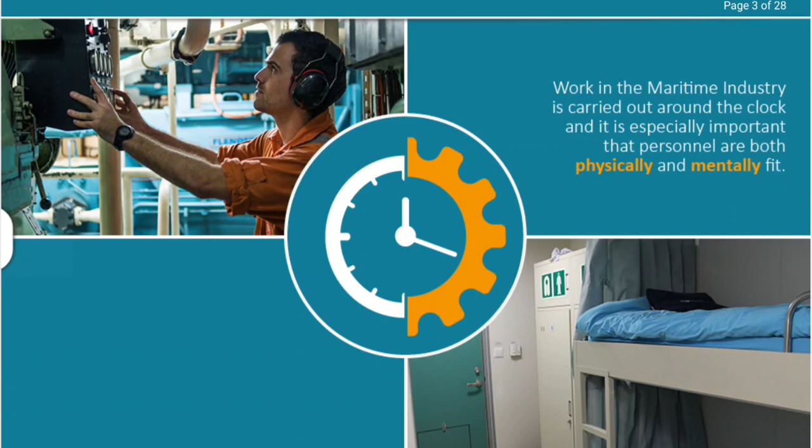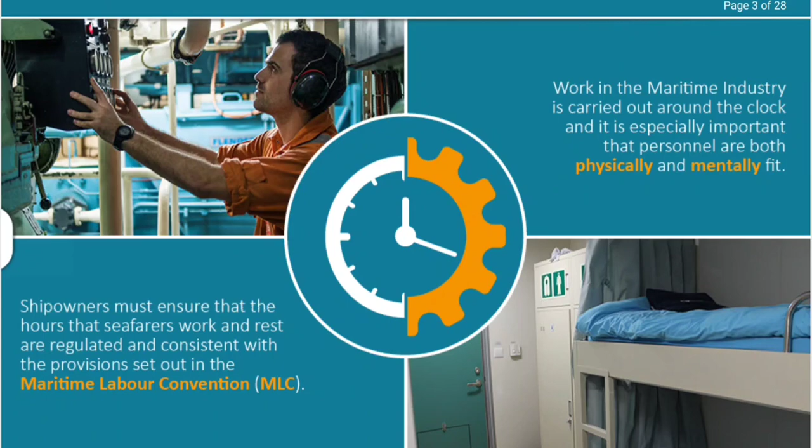Work in the maritime industry is carried out around the clock, and it is especially important that personnel are both physically and mentally fit to ensure a safe working environment is maintained at all times. Ship owners must ensure that the hours seafarers work and rest are regulated and consistent with the provisions set out in the Maritime Labour Convention.

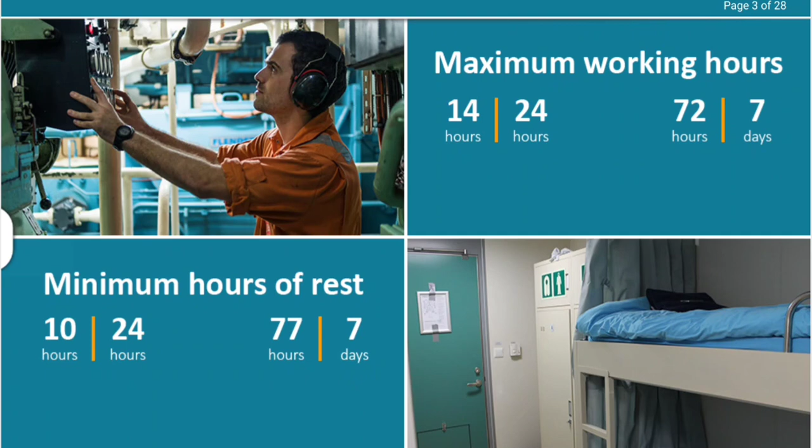The MLC states that seafarers' maximum working hours should be 14 hours in any 24-hour period and 72 hours in any 7-day period. Seafarers' minimum hours of rest should be 10 hours within any 24-hour period and 77 hours in any 7-day period. Hours of rest may be divided into two periods, one of which must be at least 6 hours long. Seafarers cannot work for more than 14 hours without taking any rest.

The hours of work and rest for all crew members, commonly referred to as the shipboard working arrangement, must be displayed in a place that is easily accessible by all seafarers. This table must be provided in the working language of the ship and in English.

In addition, a log recording the hours of work and rest for every crew member must be maintained at all times. This log must be signed by the master, or a person authorized by the master, and the seafarer, and be available for inspection on request. Please note, seafarers must also receive an endorsed copy of their hours of work and rest.

There will be times when personnel may be disturbed during their rest periods in order to carry out operational-related call-outs or manage emergency situations. If an individual has been woken from sleep to complete their duties, this should be taken into account when considering their level of fatigue risk during assessment.

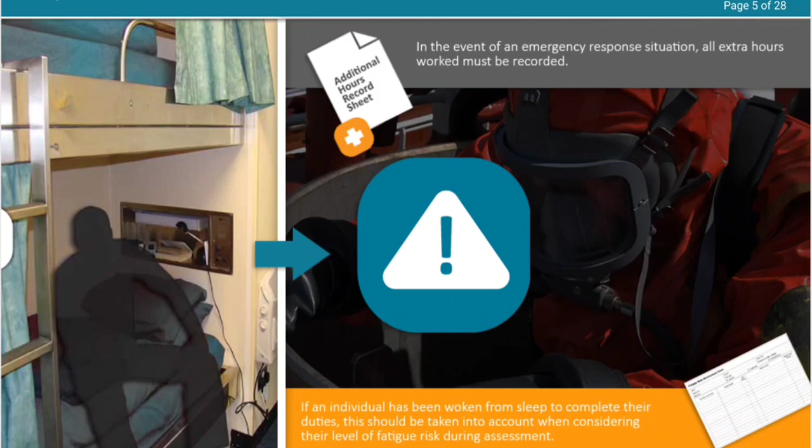In the event of an emergency response situation, all extra hours worked must be recorded. Wherever possible, there should be a regular rotation of emergency response personnel to ensure that anyone required to work outside their normal hours in this capacity is provided with adequate rest and recovery time.

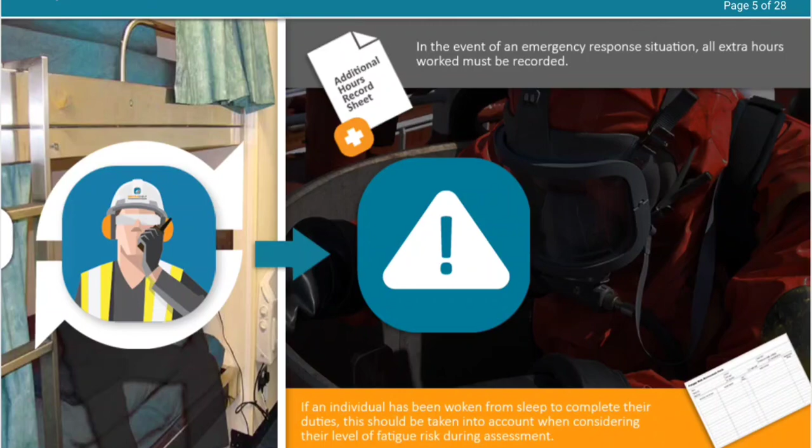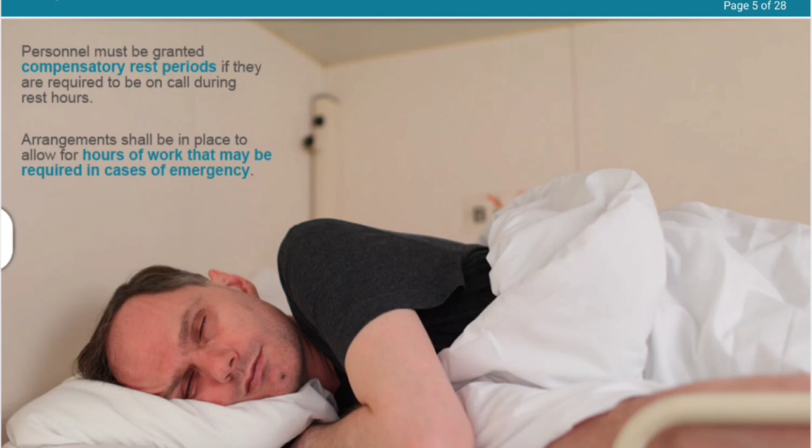Personnel must be granted compensatory rest periods if they are required to be on call during rest hours, and arrangements shall be in place to allow for hours of work that may be required in case of emergency. Please note, lifeboat drills, firefighting drills, and drills prescribed by national laws and regulations should be conducted so as to cause minimum disruption to rest periods.

So, what is fatigue? Fatigue is more than just feeling tired after a day's work. Fatigue is commonly accepted to be a state of mental or physical exhaustion that can significantly impact your ability to work safely, communicate clearly, and react effectively in an emergency situation.

Common causes of fatigue include a lack of sleep, stress, anxiety, overwork, and poor health. We often underestimate the negative effects that fatigue can have on our performance, while simultaneously overestimating our ability to cope with it. If fatigue is not carefully managed, it can have disastrous consequences.

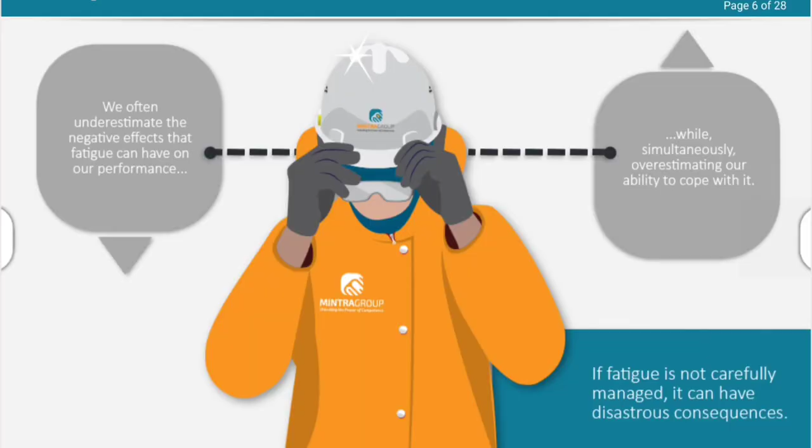Let's take a look at an example of a major incident where fatigue was found to be a significant contributing factor. On the 24th of March 1989, the tanker Exxon Valdez ran aground on Bligh Reef in Alaska's Prince William Sound. The tanker's hull was damaged and the equivalent of more than 250,000 barrels of oil spilt into the Pacific Ocean.

The subsequent U.S. National Transportation Safety Board investigation found that worker fatigue had played a significant role in the incident, stating that there were no rested deck officers on the Exxon Valdez available to stand the navigation watch when the vessel departed from the Alyeska terminal.

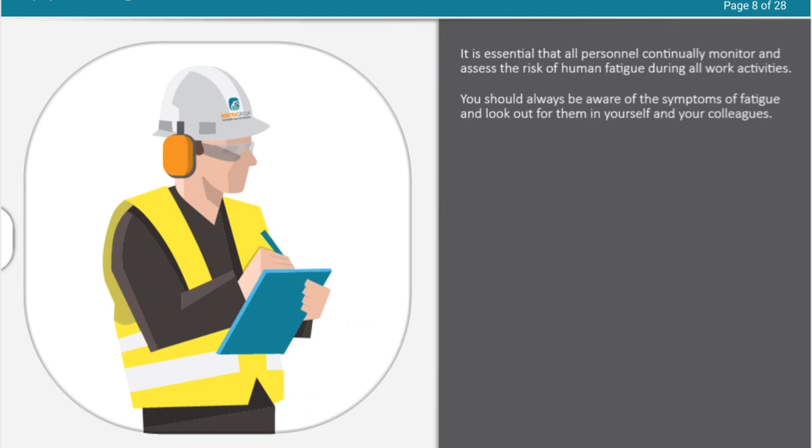It is essential that all personnel continually monitor and assess the risk of human fatigue during all work activities. You should always be aware of the symptoms of fatigue and look out for them in yourself and your colleagues.

Do you know what the symptoms of fatigue are? Type the symptoms you think you should look out for into the space provided. When you're happy with your answer, press the Submit button.

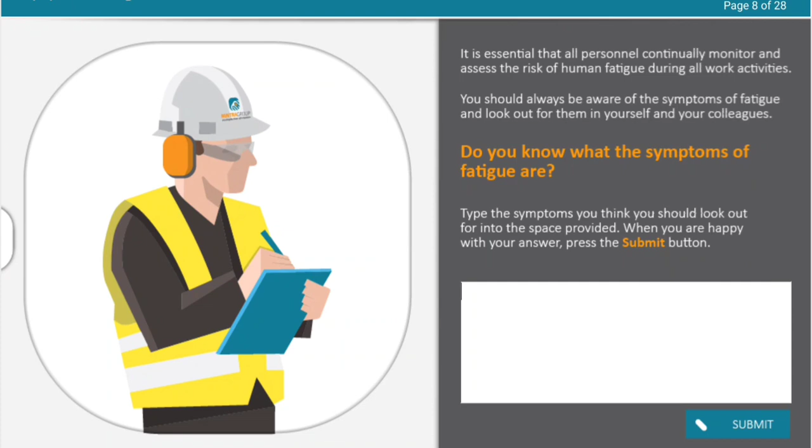Some of the most common symptoms of fatigue include yawning, poor hand-eye coordination, fidgeting, microsleeps, lack of energy, slow reflexes, speech difficulties, and head nodding.

As well as physically affecting our bodies, fatigue can also affect the way we behave and interact with others. Common behavioral effects of fatigue can include irritability, impatience and mood changes, increased risk-taking, difficulty making decisions and communicating, poor memory, difficulty concentrating and limited attention span, lack of motivation or energy, and slowed response times.

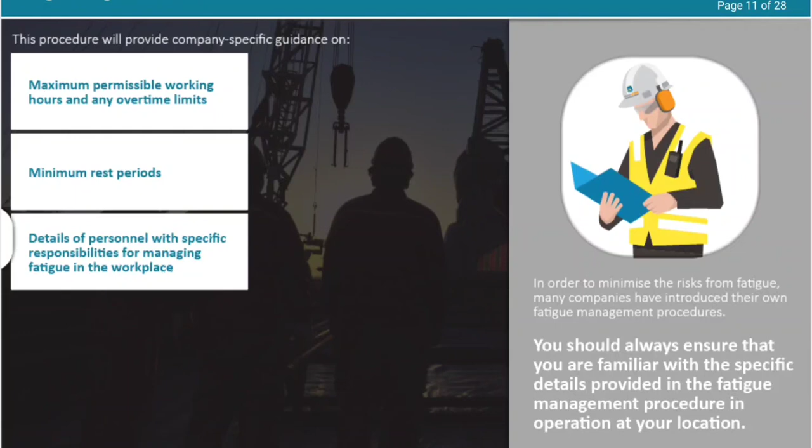In order to minimize the risks from fatigue, many companies have introduced their own fatigue management procedures. This procedure will provide company-specific guidance on maximum permissible working hours and any overtime limits, minimum rest periods, details of personnel with specific responsibilities for managing fatigue in the workplace, contingency planning for unusual situations, and systems in place to monitor, record, and audit any additional hours or days worked.

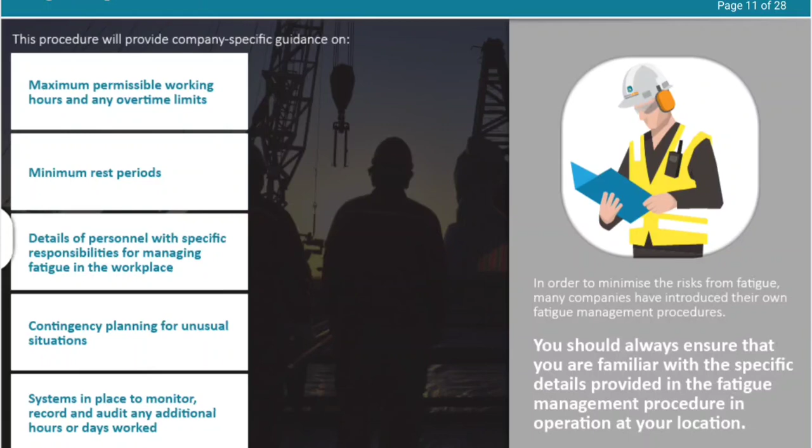As a minimum, all personnel will be expected to comply with the requirements of the procedure by presenting themselves as fit for work at the start of and throughout their shift, notifying their supervisor if they feel their work performance is likely to be affected by fatigue, and communicating any personal fatigue issues to their supervisor.

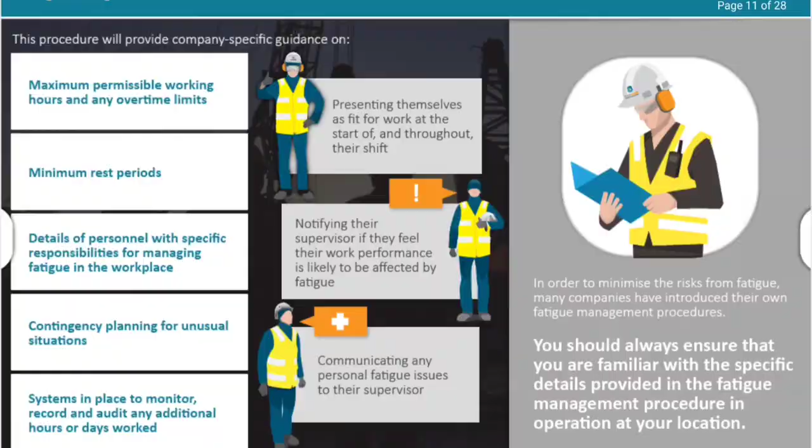The risks from human fatigue are often given less attention than risks associated with major accident hazards. It is critical, however, that these risks are recognized and managed in the same way.

Research states that 80% of all workplace accidents are directly related to human behaviors. It is therefore essential that fatigue is fully considered and appropriately risk-assessed during all work activities.

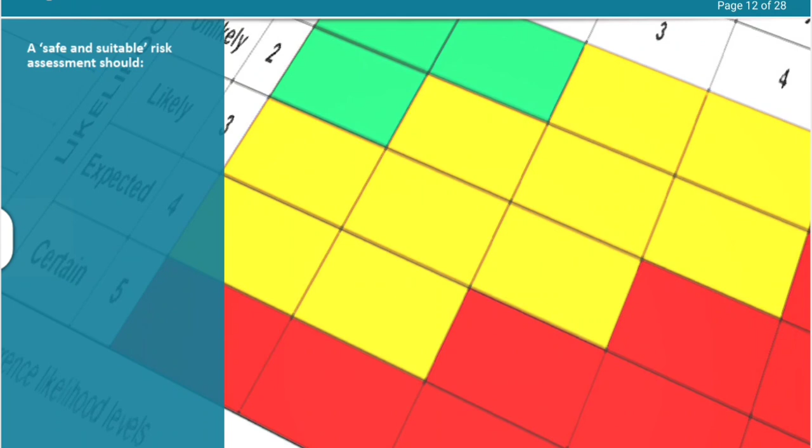A safe and suitable risk assessment should identify the specific aspects of an operation that pose a particular fatigue risk, quantify the severity of the risk, and identify suitable control methods.

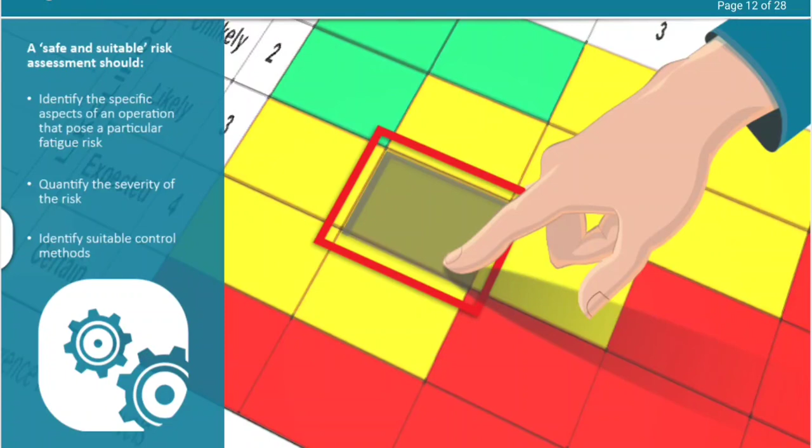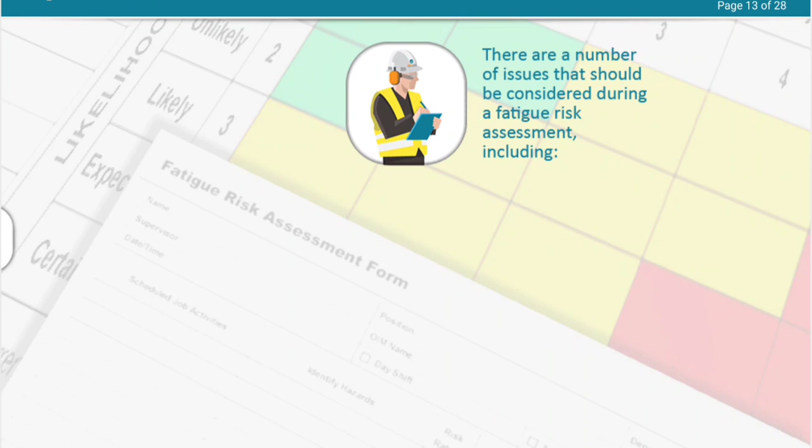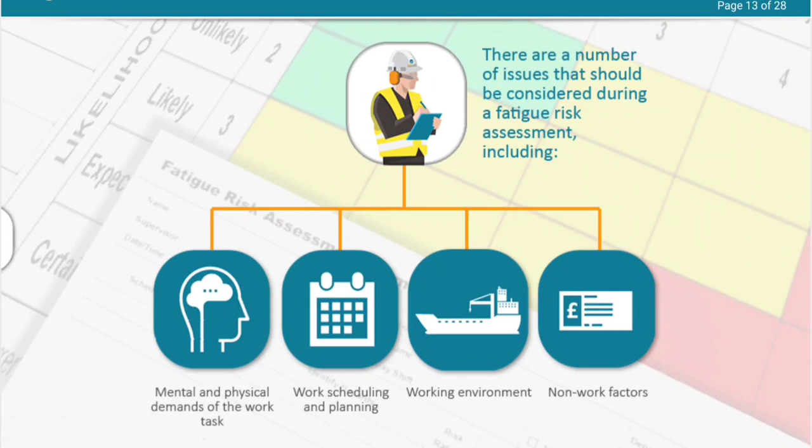There are a number of issues that should be considered during a fatigue risk assessment, including mental and physical demands of the work task, work scheduling and planning, working environment, and non-work factors such as family or money worries. Examples of fatigue-related risk factors and some possible control measures are being displayed on screen.

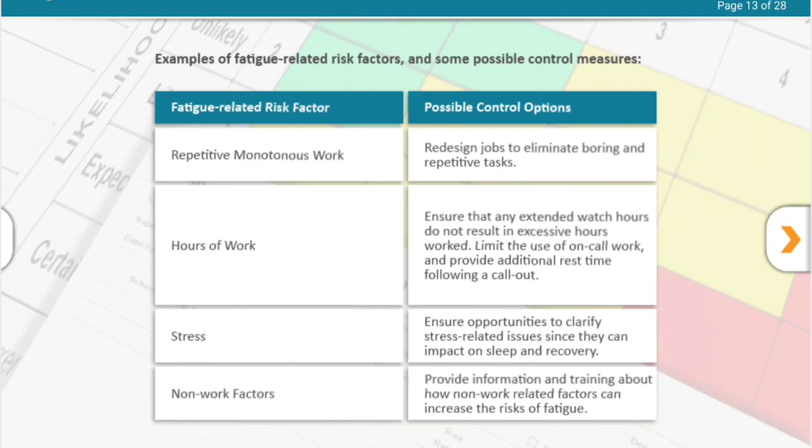There are several methods that can be used to help identify personnel who may be suffering from fatigue. These include self-assessment and voluntary disclosure by the person affected, direct observation of a person's behavior, investigation findings following a workplace accident or incident, monitoring conformance with our fatigue management procedure, or completion of a fatigue risk assessment.

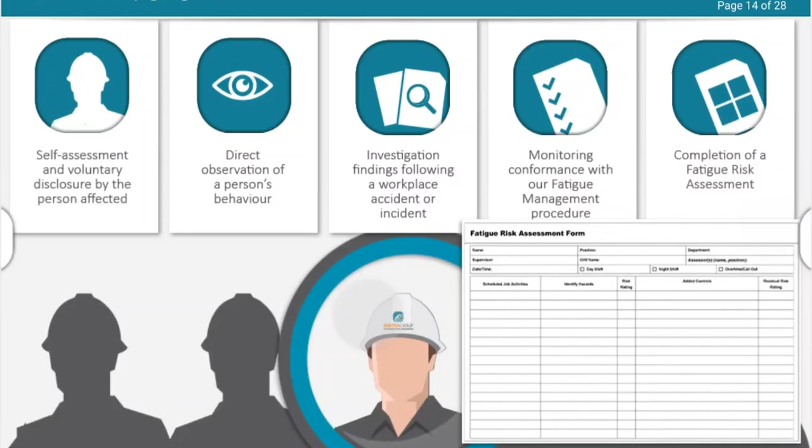If an individual suffering from fatigue presents a risk to the health and safety of the vessel, the individual must be withdrawn from operational activities immediately. Wherever possible, the affected person should be offered the opportunity to have a good and undisturbed period of restorative sleep.

Thereafter, the master and relevant supervisor shall undertake a further risk assessment to determine if any additional action should be taken. The fatigue appraisal and assessment process must be repeated for every consecutive day that the individual remains on board and should be recorded appropriately.

The health, safety and well-being of personnel is paramount. It is essential that you obtain sufficient sleep and rest during your break periods to ensure you can complete your duties as safely as possible.

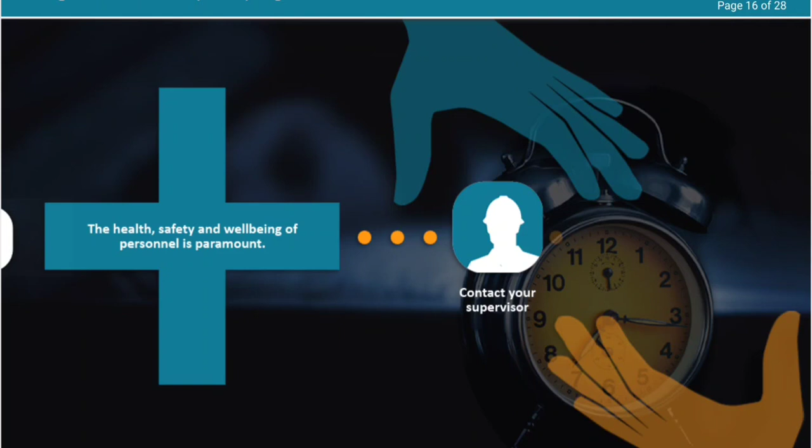If you feel that you need any help to manage fatigue, you should contact your supervisor for support and guidance in the first instance. The supervisor will then liaise with the master to decide the best course of care.

Well done. You have completed this course on fatigue management. You should now be able to describe the general requirements of the Maritime Labour Convention, MLC, in relation to hours of work and rest. Explain what is meant by the term fatigue.

Identify the common causes of fatigue. Recognize the serious consequences that fatigue can have. Explain how to recognize the symptoms and effects of fatigue in yourself and others.

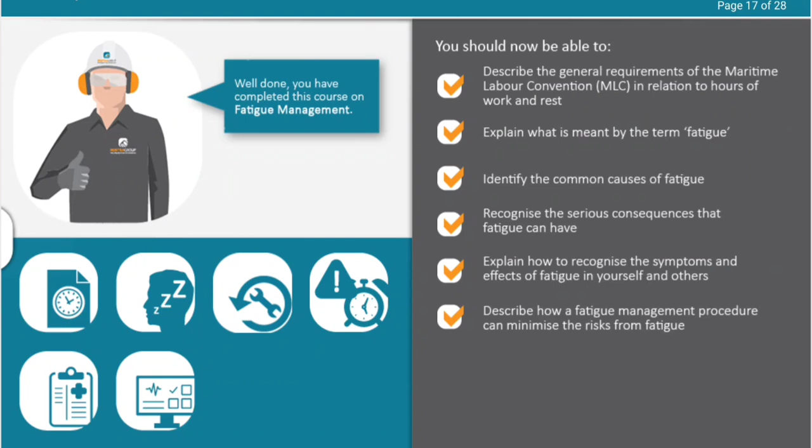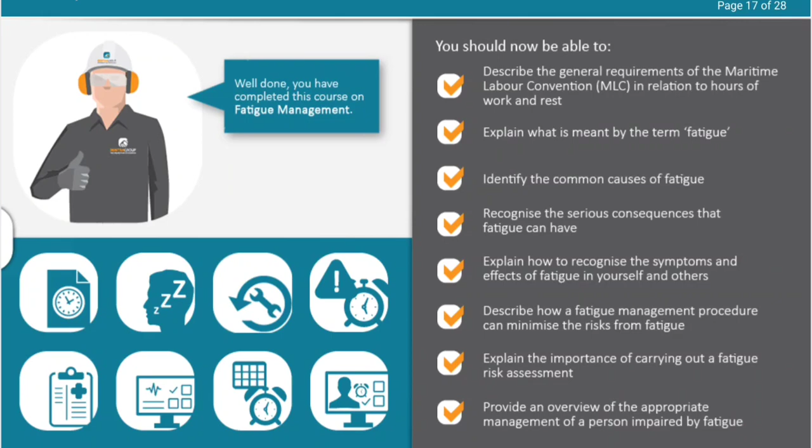Describe how a fatigue management procedure can minimize the risks from fatigue. Explain the importance of carrying out a fatigue risk assessment, and provide an overview of the appropriate management of a person impaired by fatigue. Select the next button to begin the end of course assessment.